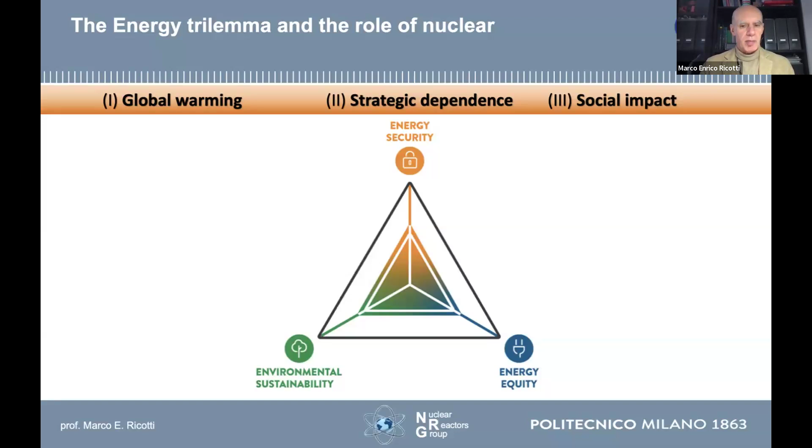A brief overview of what's going on today and in the next decades at the international level. This is a slide that I use every time I have a seminar on nuclear energy. These are the five different technologies that nuclear may offer as a contribution to solving the energy trilemma. First of all, we have more than 415 nuclear power plants in operation in the world. They are of what we may call standard technology, developed in the 70s, 80s, and 90s.

Several of those units are reaching the end of their commercial life, typically after 40 years. They should be shut down, but what is going on is that very likely those power plants are well managed, well designed, well built. The margins of safety and operability are very high, quite good. So what occurred in the US in the last 10, 20 years will surely occur also in Europe and in other parts of the world.

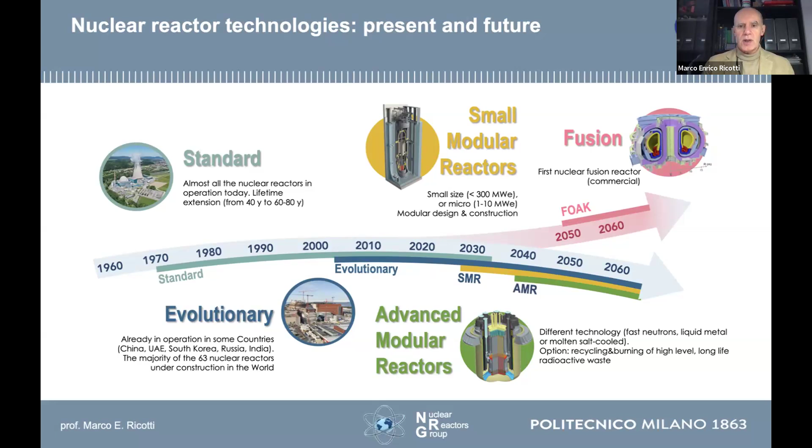And then 2050 or beyond, though some people are saying it will be before 2050, we may have the first commercial units based on fusion reactors. But this is really a challenging issue. Let's go to the main features of small modular reactors. Small modular reactors are reactors with a smaller size with respect to the traditional one, which is beyond 1 gigawatt. They are typically below or in the range of 300 megawatts electric.

What are the advantages and what are the challenges? The advantages are that several designers are using a sort of simplified approach in designing the SMR. Several of them are adopting a passive safety strategy, systems based on natural circulation. That means that we are substantially eliminating Fukushima-like scenarios. And I remember that there was only one safety system that operated during the Fukushima accident, in the first unit, the oldest BWR unit, and it was a passive safety system.

Then it was closed. The operator closed the valve, isolating the passive safety system, because it was cooling the reactor pressure vessel too much. And when they learned what the situation on the site was, they decided to reopen the passive safety system, but they ran out of electricity. The batteries expired. So there was no more possibility to reactivate the only safety system that was in operation in Fukushima, which was a passive safety system.

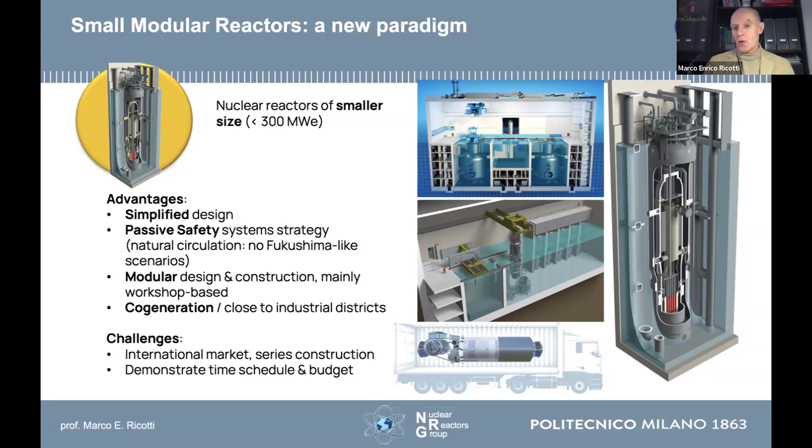So this is the key issue for, I would say, all the nuclear technologies. I mentioned 2040, more or less. We may have also the availability of advanced modular reactors. No more water-based. Typically, the main SMR concepts are water-based technology. With the advanced, we are moving to liquid metal reactors. So liquid lead or liquid sodium or molten salt.

So it's a different reactor physics, no more thermalized but fast neutron spectrum. And the advantages are, I would say, the same of SMR, so water-based. We have an increased efficiency. We may overcome quite easily 40% of efficiency in the thermal cycle. We may open a different option, that is the waste burner option. But for doing that, we need to separate the high-level waste. We have to recycle, and then we will burn.

The challenges for this type of technology are mainly the fuel development, the fuel cycle, the economics, and the fact that I have to integrate three nuclear plants. The first is the nuclear power plant, the nuclear reactor. The second plant that I need is a recycling, a reprocessing facility. And the third nuclear plant is the refabrication of the fuel. So I need on the same site, essentially, three nuclear plants. And the first country that will be able to demonstrate that in the coming years will be Russia.

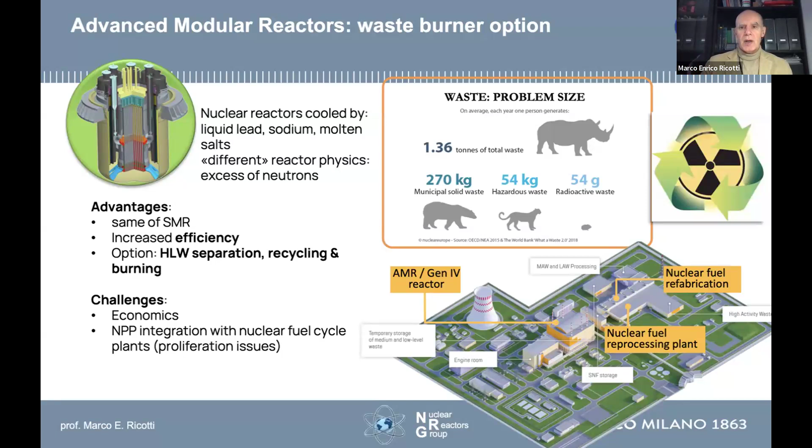We have different concepts of SMR and AMR. We may have a sort of clustering of those concepts by their use or by their site. For example, we may discriminate the SMR, AMR concepts in terms of land-based nuclear reactors or marine-based or transportable nuclear reactors, or in terms of electricity and heat production versus the use of SMR or AMR for propulsion.

And this could be a very interesting market because the cargo ships are emitting a not negligible quantity of CO2. Now, due to the geopolitical issues, the cost of transportation of goods increased a lot. Also, the time of transportation. So a nuclear reactor as propulsion for cargo ships is something that is very attractive today. The last type of clustering could be with respect to the grid. Some SMR units may be connected to the grid, or others may be off-grid, related to remote areas, for example.

Or we may discriminate the concepts of SMR and AMR by reactor technology. So we will have light water reactors. We may have integral layout versus classical loop type layout for PWRs, for example. But we may have also sodium cooled, lead cooled fast reactors, molten salt reactors, high temperature gas reactors, and microreactors that may use different technological solutions. For example, heat pipes instead of a cooling system in the classical way.

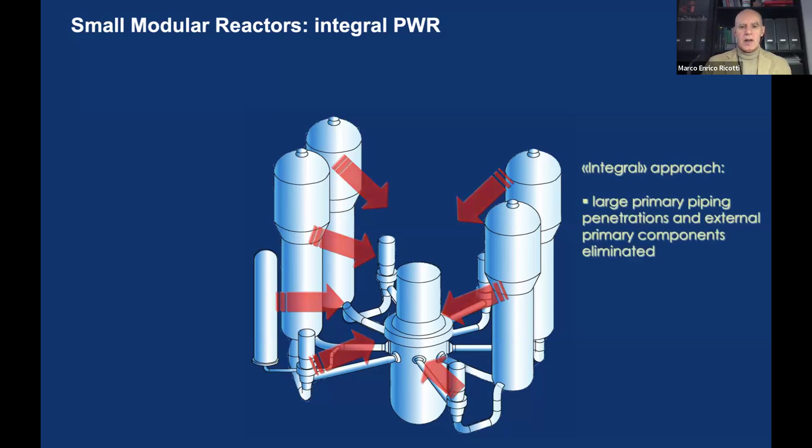Let me put some focus on the integral PWRs because they are a good percentage of the SMR concepts that are proposed today. And we spent a lot of years studying and putting research on this type of concept. You see here what you know already well, the classical PWR layout with the reactor pressure vessel, the primary piping, the steam generators, the pumps, and the pressurizer. So let's imagine that we may put all the large components that are outside the reactor pressure vessel all inside one single larger, taller reactor pressure vessel.

This is the integration. In this way, we may eliminate the large primary piping penetrations, and all the external primary components are included inside the reactor pressure vessel. So we end up with a PWR still, but with a very compact layout. The other advantage is that we may use a compact containment, and we have a smaller primary building and a smaller footprint for the power plant.

This is an example of comparison between the containments. The steel containment for AP600, a classical two-loop PWR developed by Westinghouse, and this is the size of the containment. It's a steel containment, 40 meters in diameter and almost 60 meters in height, versus one concept that we developed with Westinghouse in the past, the IRIS integral reactor concept, with only half the size, so 335 megawatt electric, but with a very small and compact containment, steel in steel, 25 meters diameter, the sphere, so 1/6, 1/8 of the volume of the containment.

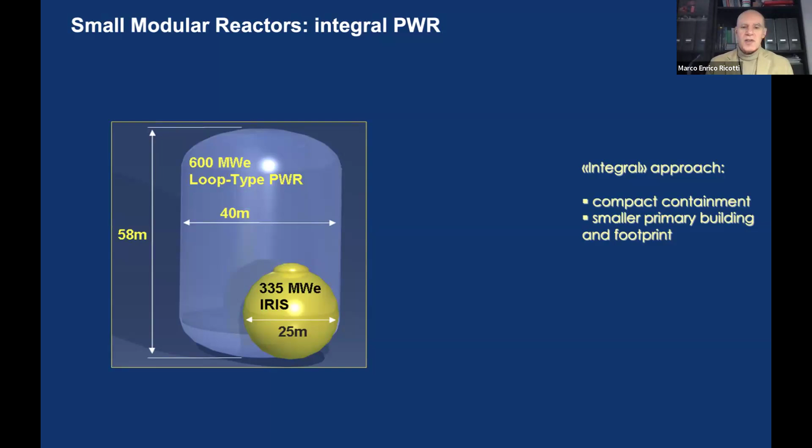The integral PWR is usually putting all together the steam generators, the pumps inside, also the internal control rod drive mechanism. Not all the concepts are like that, but this is the maximum level of integration that we may reach. So we have penetrations of the reactor pressure vessel, but not primary penetrations. They are secondary side penetrations.

So we have the core at the bottom, we have a large riser. On top of the riser, we have the control rod drive mechanism. And then in the annular region, we have on top here the main circulation pumps. Then in the annular zone, we have the steam generator modules, and then we have typically quite a large downcomer in the lower part of the reactor pressure vessel.

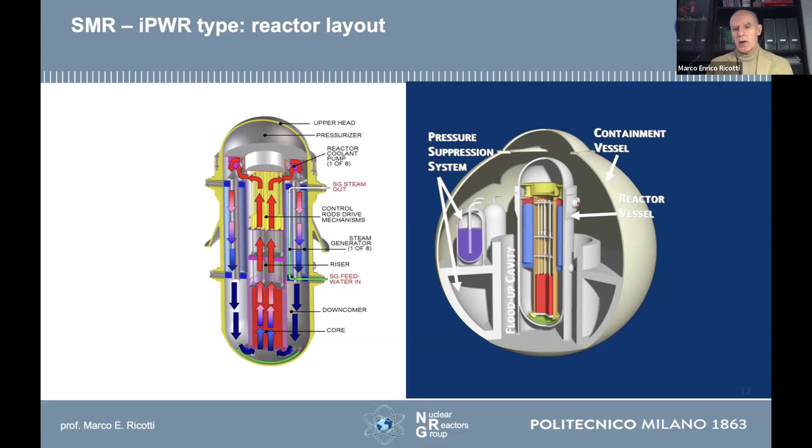If you are adopting a very compact containment, like in this case, but it is also the same for NuScale, for example, in some cases we may adopt the typical BWR containment strategy, that is the pressure suppression containment, not a pressure containment. And this is what we developed for IRIS, with the pressure system to suppress the steam in case of a small break LOCA with the pressure suppression pools.

But really, in terms of SMR concept, if we look at the integral PWR, this is not really a brand new concept, because a very similar integrated concept was in operation for more than 10 years on the German ship Otto Hahn. It was a cargo ship using an integral PWR, 38 megawatt thermal, with helical coil steam generators, a solution that is largely adopted by several SMR concepts today.

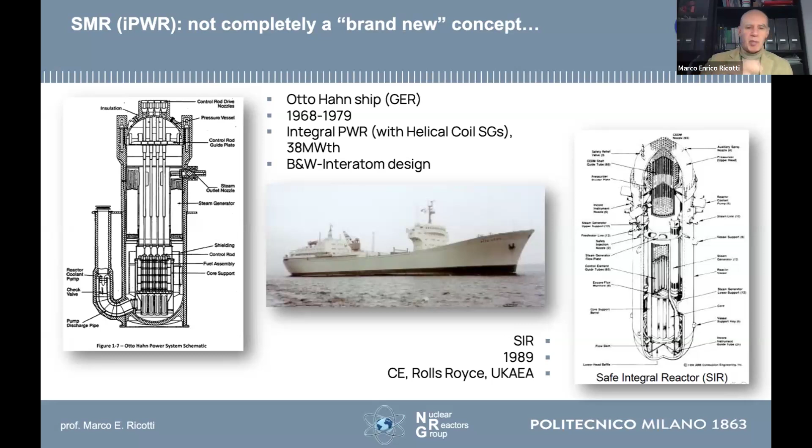And at the end of the 80s, there was another project in the UK by Rolls-Royce. It was the SIR, safe integral reactor, that was very similar to the Otto Hahn ship nuclear reactor, with again helical coil steam generators, the modular approach, with the pump not inside but connected directly to the reactor pressure vessel.

About the fuel and fuel cycle, usually for the SMRs based on water-cooled technology, we have not really a sensible difference from the current generation 3 PWRs. So the enrichment is usually the same as the current PWR, so less than 5%. In some cases, some designs are targeting HALEU, high assay low enriched uranium, so slightly below 20%; 19% is the typical enrichment. But this is not an easy task because today high assay low enriched uranium is not really available on the shelf.

They are usually adopting shorter fuel assemblies, fuel rods, so typically half the height of the classical PWR or BWR fuel assembly. And also some concepts are proposing a boron-free core. It is a challenge for the control rods and also for the burnable poison, but it has the advantage of eliminating a huge quantity of ion exchange resins for the control of the boron content, which for decommissioning is a challenge anyway.

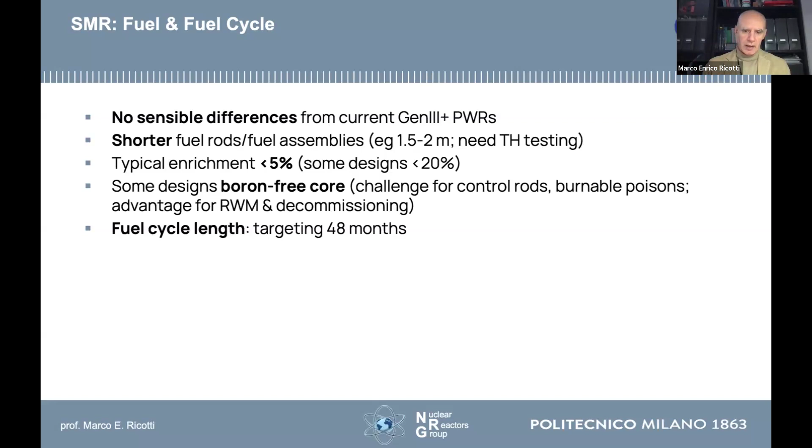About the fuel cycle length, several concepts are targeting an extended fuel cycle, typically around 48 months, so more than doubled the current fuel cycle length. And I put here a table comparison for some of the integral PWR concepts from Argentina, US, China, and others, and you can see the main differences. Only in few cases, the Russian technology, they are using 20% more or less content of U-235, but typically the enrichment is below 5%.

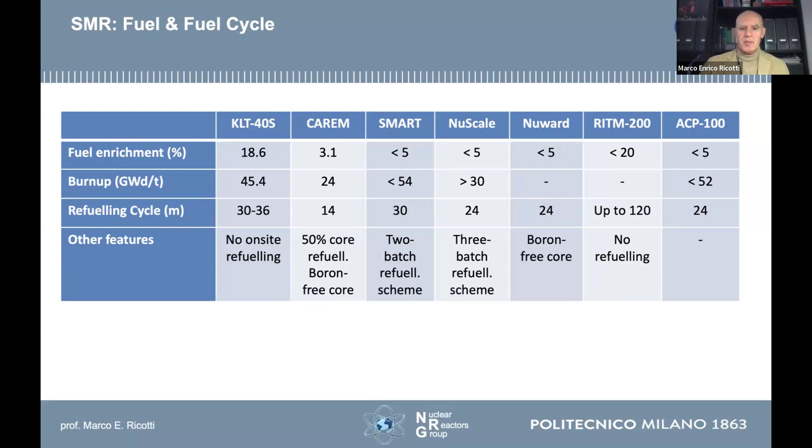Other opportunities, or the main opportunities for the SMR. I would say that SMR could be the preferable solution for electricity grids of limited size, but also for remote areas. It is also, from the economic and financial point of view, a good solution for those utilities that have limited financing capacity. They cannot afford the endeavor of a multi-billion unit cost, like for the large nuclear power plants. That means around 10 billion euros, or more than $10 billion investment for a single large unit.

Because of the size and also because of some features of SMR technology, we may more easily integrate nuclear with renewables. That means that we can avoid a system cost for the country related to energy storage and grid development, reducing the system cost for the community. As I mentioned before, we may open the window on cogeneration applications: producing electricity and heat for hydrogen production, for example with high temperature electrolysis, for district heating, for desalination, to produce biofuel, for example for aviation, and also to have hydrogen or thermal energy storage.

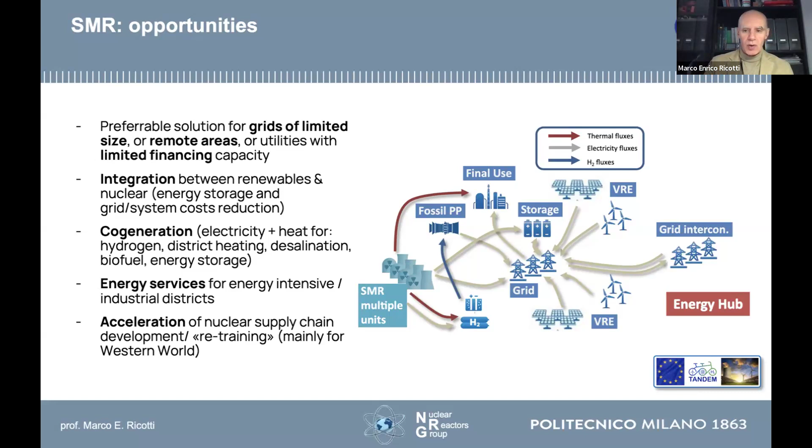Now, let us look at the safety features, the main safety features for the SMR concept. In some cases, for example, for the integral PWR, we have very interesting safety features. As I mentioned before, if we are integrating all the main components into a taller and in some cases larger in diameter reactor pressure vessel, we are eliminating by design the large loss of coolant accident because we will not have large piping penetrating the reactor pressure vessel.

If we are considering a full natural circulation PWR, integral PWR like CAREM in Argentina and NuScale in US, in that case, we don't have the pumps. But also in the other concepts, we may have pumps located internally in the reactor pressure vessel or pumps that are directly connected to the reactor pressure vessel. That means we are adopting canned motor pumps. If that solution is applied, we would have no potential leakages at all, or we have a reduced probability of leakages by the pumps.

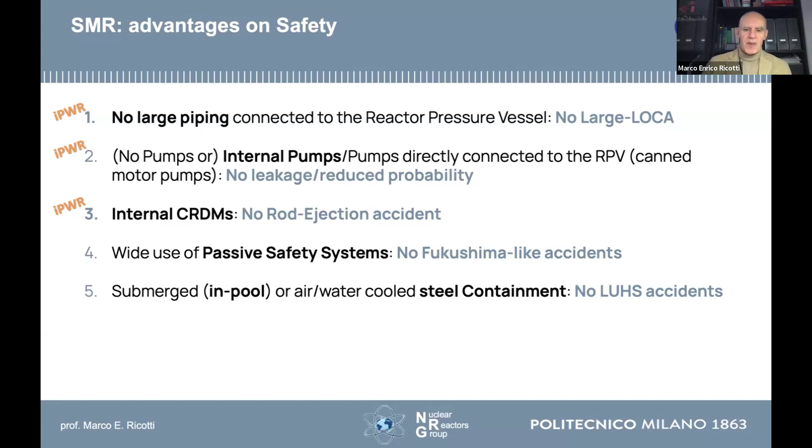Since we may target a higher level of safety for this type of SMR concept, we may also have the possibility to discuss with the safety authorities in order to reduce the emergency planning zone. And in some cases, they are claiming that for their SMR, the emergency planning zone is reduced to the fences of the power station. That means, roughly speaking, a 500 meter or maximum 1 kilometer radius area from the reactor core.

We can try to reach that goal because we have a reduced source term and we are adopting passive safety systems. So there is a high potential. It's not granted, but there is a high potential for a discussion with the safety authority in order to reduce the emergency planning zone. And this is an important feature for the stakeholder engagement, the public engagement in the nuclear technology.

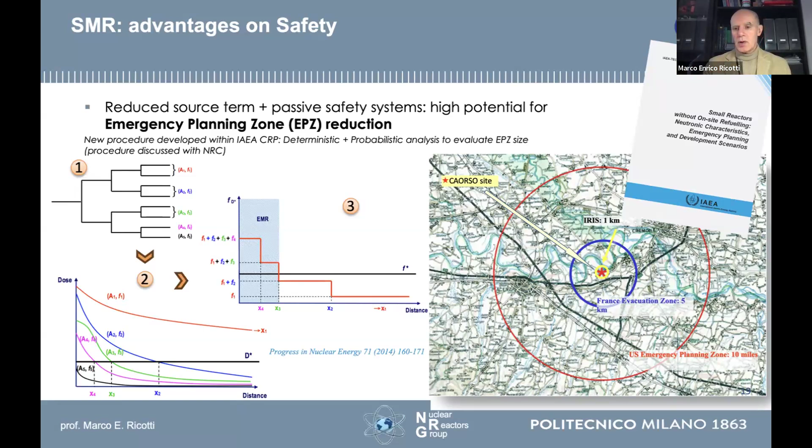There was a technical document issued in the recent past by the International Atomic Energy Agency. We developed an approach, a procedure in order to try to demonstrate that; it is a probabilistic and deterministic approach. If you want, you can download the paper from Progress in Nuclear Energy or download the tech document from the agency site.

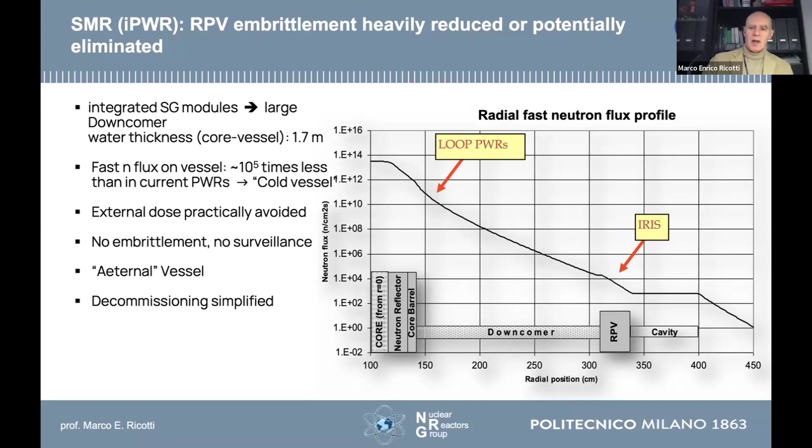Other innovations in terms of safety, if we are adopting passive safety systems, I would say mainly for integral PWRs, but not only. For example, for the core cooling system, we may inject water by gravity in a passive safety system. The decay heat removal system could be based on natural circulation with two-phase flow in closed loops. We may target an in-vessel core retention strategy in case of severe accident, if we can flood the reactor cavity.

The diverse shutdown system is, I would say, a classical boronated water injection, but not in an active system, but by a passive system, so by gravity. And if we are adopting a steel containment, we may have a steam condensation by external water or air, as I mentioned before, if it is submerged into a pool, or if we are using natural circulation by water or by air outside.

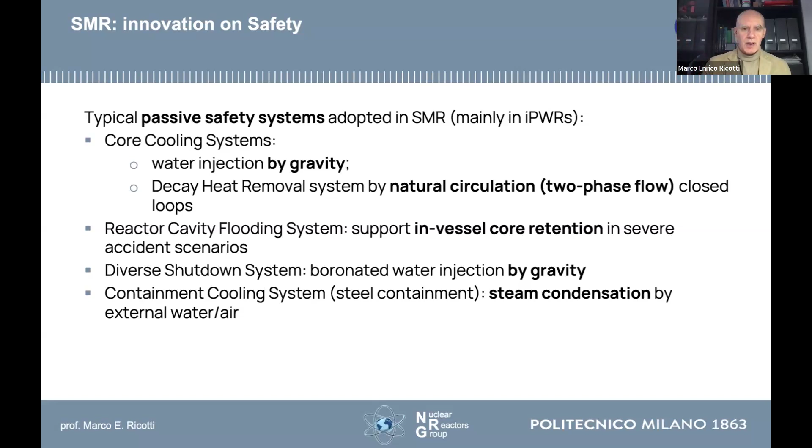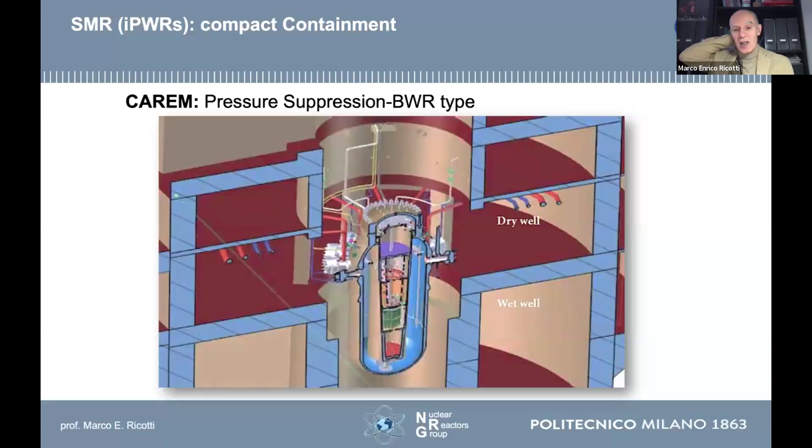The compact containment, I showed you the slide at the beginning. We may adopt the pressure suppression, classical BWR type containment, even for a PWR integral concept. And this is the case for CAREM, the Argentinian design. And you see here a pressure suppression containment that is very similar to the BWR concept.

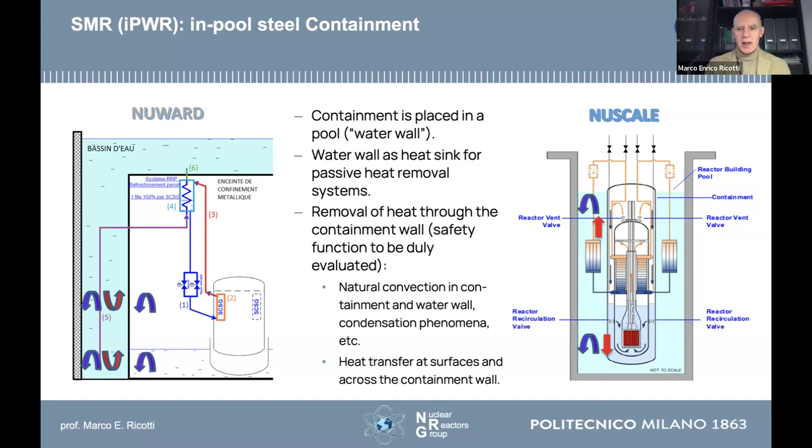In case of the steel containment, we had a past option, now the design has changed, or the current design of NuScale that is using a steel containment, the steel with the reactor pressure vessel, the integral PWR inside, all submerged into a large pool with the heat exchangers in the pool itself that are operating in natural circulation.

With respect to the size of the SMR, we may target a very interesting safety feature like in NuScale, since the size of the NuScale module is very, very small. It was at the beginning 55 megawatt electric. Now, because of economics, they upgraded the concept to 77 megawatt electric. I would say that it's still a challenge from the economic point of view, but from the safety point of view, it may offer a very interesting solution

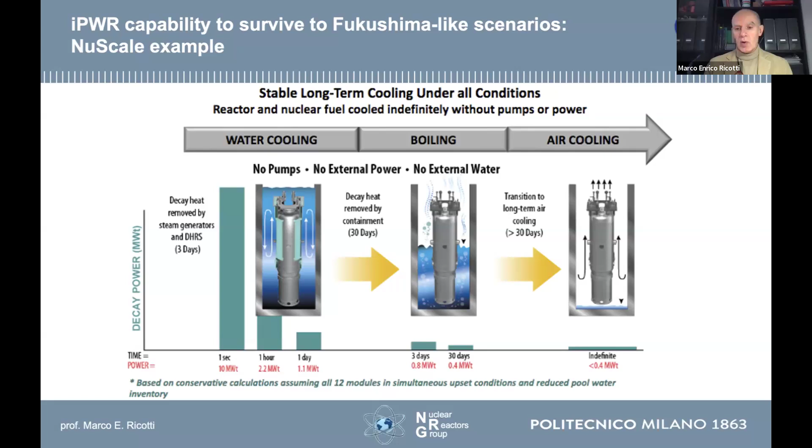The water in the pool is cooling down the reactor pressure vessel just by evaporation. And after 30 days, the decay power is so low that once the water is completely evaporated, just the natural circulation by air is able to cool down and keep the reactor core in a safe mode. Obviously, this is allowed by the adoption of water, the steel containment, but also because of the very small size of the module.

The typical passive safety systems that are adopted for the decay heat removal or residual heat removal system are passive safety systems directly connected to the steam generator with the water pool or with air cooling, or directly connected to the primary side. In the first case, remember that the steam generator is inside the reactor pressure vessel in case of the integral PWR. It would be outside if it's a classical loop type. In the second case, we have the natural circulation loop directly connected to the reactor pressure vessel.

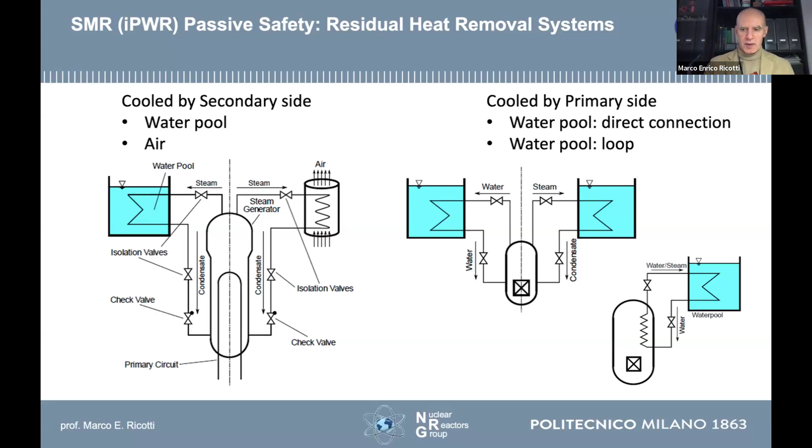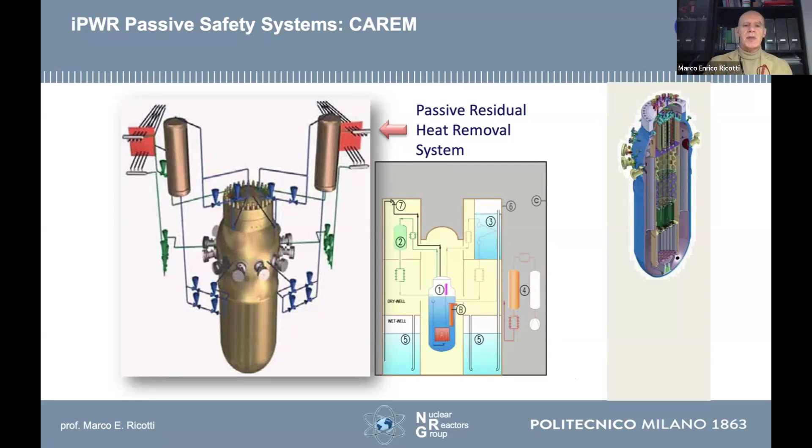And these are some examples of the integral PWR concept. This is CAREM, the Argentinian one. The passive residual heat removal system shows that there is a condenser dipped into a pool, number 3 here on the right side of the slide. And this condenser is directly connected to one module of the steam generator that is inside the reactor pressure vessel.

The same solution for NuScale. They have a classical condenser placed into the large pool. And this condenser is closing a natural circulation loop through the helical coil steam generator that is inside the reactor pressure vessel.

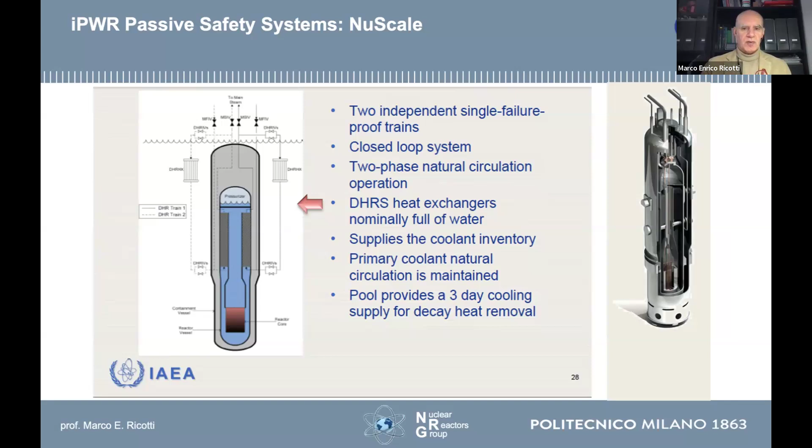A similar solution was designed recently for SMART, the Korean SMR, when Saudi Arabia became a partner of the project. Saudi Arabia asked KAERI, the Korea Atomic Energy Research Institute, to modify the original design of SMART, which was an active-based safety system strategy, into a fully passive-based safety system strategy. So again, they connected a condenser and an external pool to the steam generator modules, which in this case are also helical coil steam generators.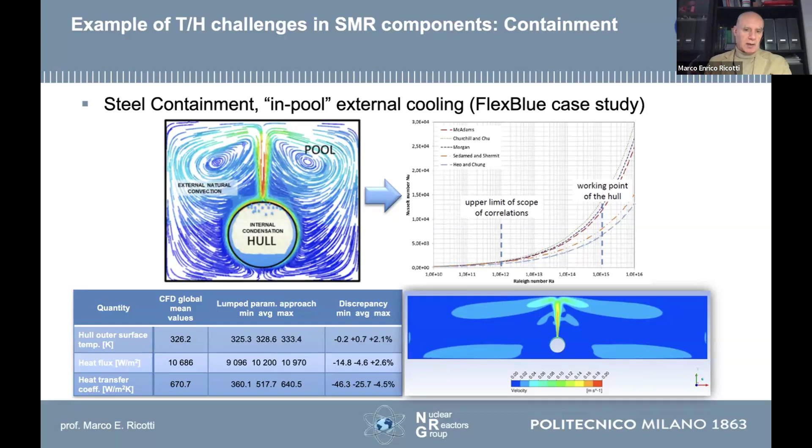And this is something that we studied for Flexblue, the French concept of SMR into a hull, a sort of hull of submarine. Because of the large dimension, more than 15 meters diameter of the hull, we end up with this type of situation. So the only way was to investigate this solution with CFD. But that means that we need experimental activities to validate that CFD analysis.

Another challenge from the thermohydraulic point of view is the large downcomer that is very positive for the thermal inertia, very positive from the neutronics point of view, the very reduced embrittlement of the reactor pressure vessel. But it means that we would have a large turbulence in that area. We had the problem of investigating the level of mixing of hot water, cold water, boronated water, fresh water into the downcomer in order to guarantee that we will have a good mixing of the water at the inlet of the reactor core to avoid a hot spot in terms of reactivity into the reactor core itself.

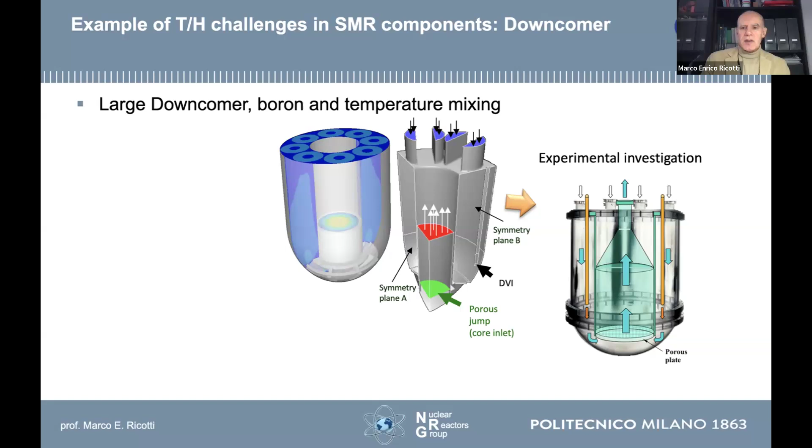And this was an activity that we performed in the recent past for the IRIS design. We had to set up an experimental facility to investigate the mixing, but we had also to develop nonlinear eddy viscosity models for the CFD analysis. So it is a modeling and experimental activity that is required by the new layout, the new solution that some SMRs are proposing.

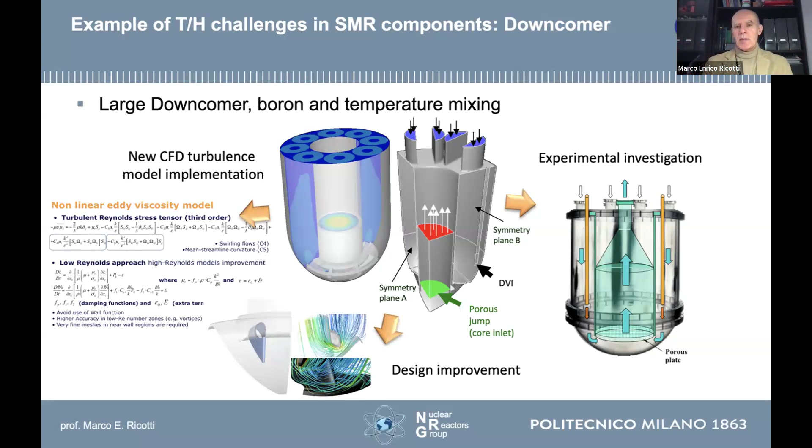Not only modeling, I mentioned the experimental activity. The experimental activity is fundamental, especially if we want to license the SMR concept. We are typically approaching two different sets of experimental activities. The first group is the so-called separate effect test facilities. They are devoted to the fuel investigation and also the investigation of the components that are typically integrated. So the pumps, the steam generators, the control rod drive mechanism, the pressurizer.

I need those separate effect test facilities to demonstrate the capability of the code to predict the real behavior of those integrated systems. I have also to investigate the safety system, typically the passive safety system that I'm using in natural circulation in two-phase flow. But at the end, to convince the safety authority, I have to show them not only separate effect test facilities, but very likely also an integral effect test facility.

That means one large facility that is simulating all the system, the primary system and the safety systems. Typically with a large scale, I need to demonstrate the capability of the codes to simulate the integration of the components and the interaction between the primary system, the safety system, and in some cases, even the containment, if I'm adopting the steel containment.

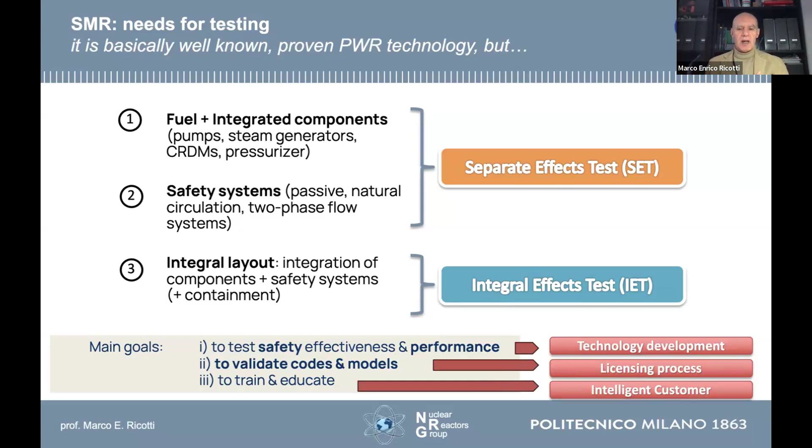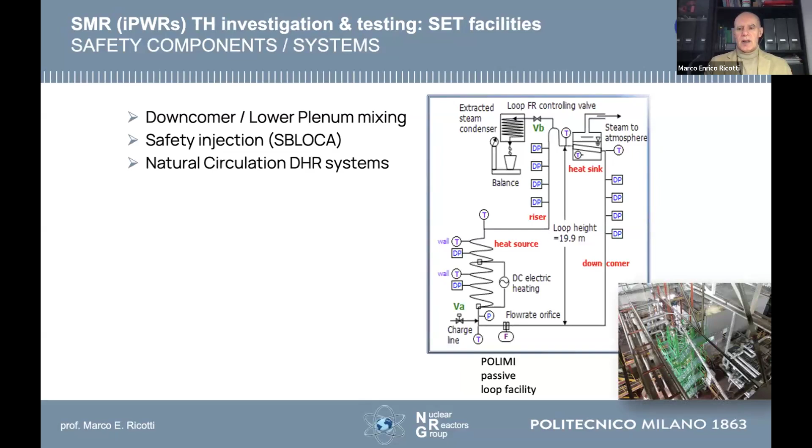Here, some examples of separate effect test facilities. This is a facility that we set up in Italy, in the SIET lab some years ago for the IRIS project. It was the simulation of the whole passive safety system based on the helical coil steam generator module, and then a condenser outside of the reactor pressure vessel, but within the steel containment, to set up a closed loop without a pressurizer, a pressure sliding system.

And we investigated the performance and also the map of stable behavior of the system in order to investigate the natural circulation.

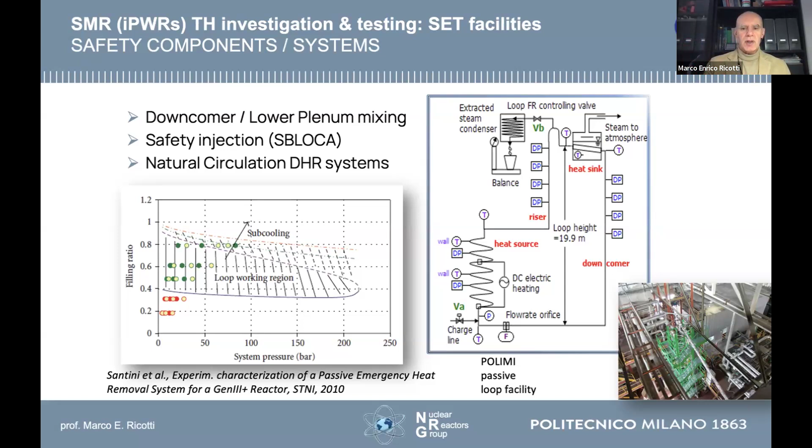But we will need also integral testing facilities, and this is an example of the Chinese colleagues for the ACP100. They set up one of the largest integral effect test facilities in the world. It was 1-to-1 full scale in height because you cannot scale down natural circulation. So you have to set up a full scale in height system. Also full scale in pressure and temperature.

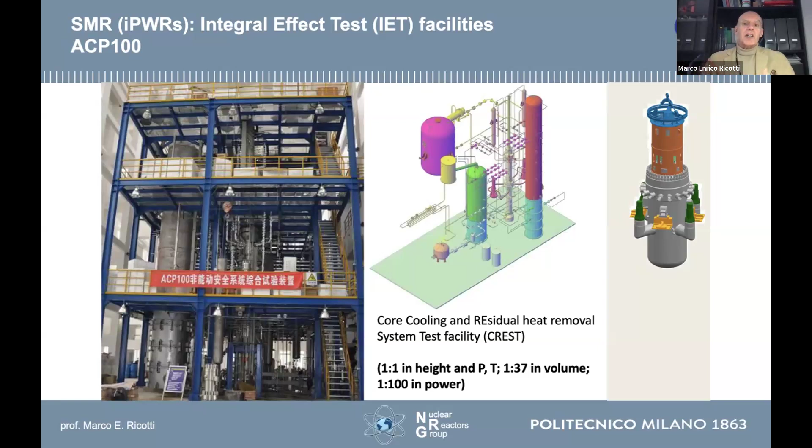But anyway, with the large scaling, 1-to-37 in volume, that is one of the largest facilities in the world, and 1-to-100 in power. Typically, to give you an idea, in SIET, they set up the integral testing facility for the AP600, AP1000 Westinghouse large reactor. And the scaling factor for that large facility was 1-to-357. So here it is one order of magnitude larger for testing the integral PWR.

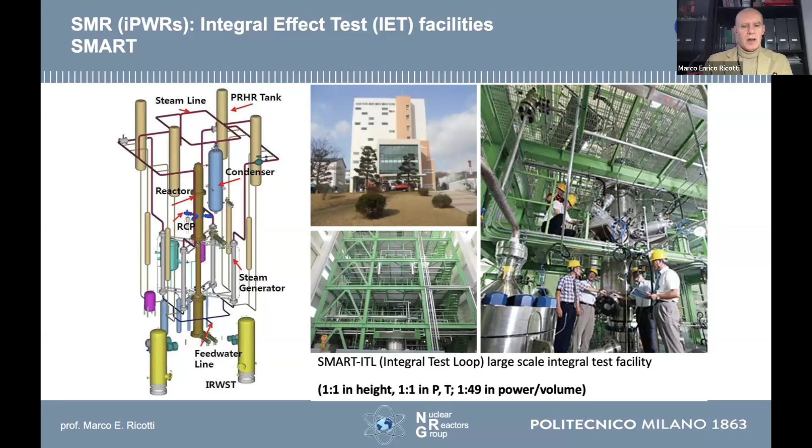And also the SMART facilities, the integral test facility for SMART, the Korean concept, was similar. It was an integral loop, full scale in height, pressure and temperature, and 1-to-49 in power and volume.

One approach, very interesting approach to the safety analysis that we may use for developing this SMR concept is the risk-informed approach. So the integration between deterministic analysis and probabilistic analysis. This is another experience that we had for IRIS. We had the design and safety analysis team addressing the deterministic approach. And then we had a PSA team, a probabilistic safety analysis team. The design team was providing data and boundary conditions to the PSA team.

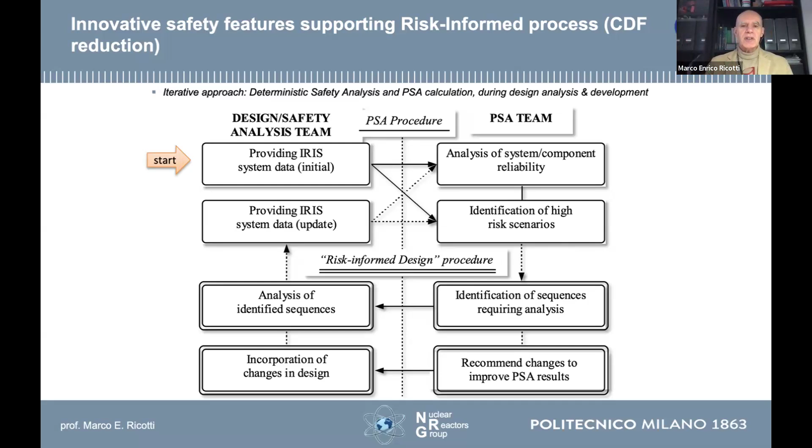The PSA team performed the preliminary PSA analysis, identified the weak points in the design, and gave this type of information to the design team. The design team changed the design, provided new data to the PSA, and that loop was performed several times during the years, during the development phase of the concept. And this is the result.

So we start with the estimated core damage frequency for IRIS that was 10 to the minus 6. And every dot is a change in the IRIS SMR design. We worked a lot in 2003, 2004, 2005, having this loop of design development, PSA analysis, design change, PSA analysis, and so on. After several changes, we ended up with a core damage frequency that was reduced by 2 orders of magnitude. So from 2 times 10 to the minus 6 to 2 times 10 to the minus 8.

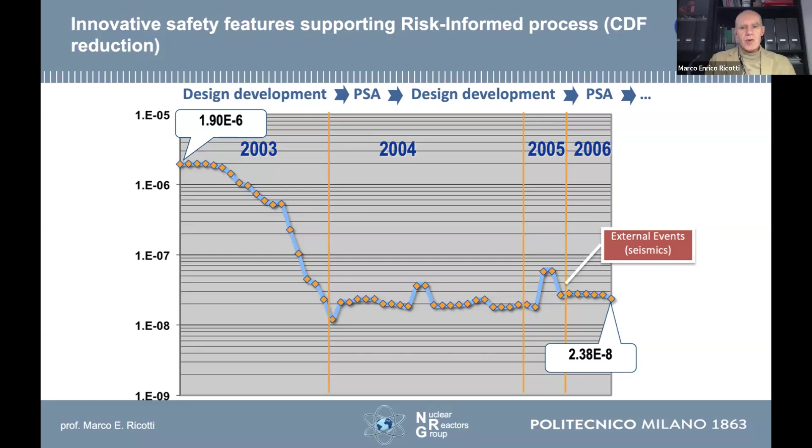Even after including the external events, the seismic events, since we decided to go with the fully seismically isolated primary building. So this is quite an interesting result of this type of approach that is anyway adopted by several SMRs today.

But the real story was quite different. All those projects had more than 7 years of delays and more than 80–90% overrun in the budget. In some cases, like Olkiluoto, they almost tripled the cost of the construction of the unit. In one case, it was even worse. This is Summer. They started building the first AP1000. After spending $7 billion, they decided to stop.

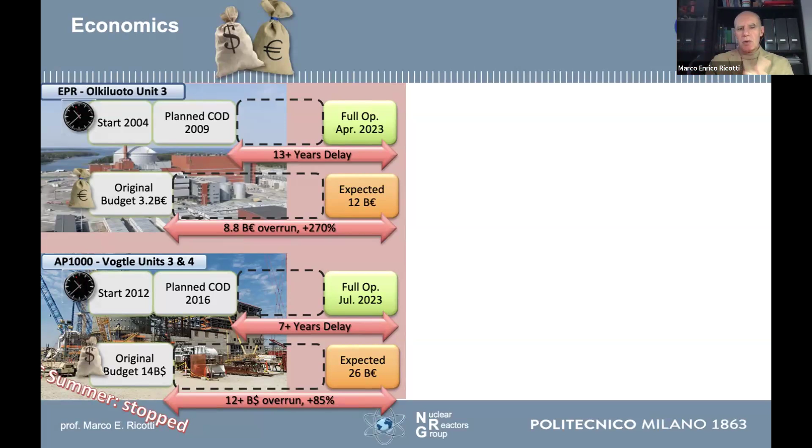It was stopped also in Vogtle, but after 2–3 years of suspension, they completed the unit. Today, VC Summer is still stopped. And it is not clear what will be the final decision for that. Is that a problem of the nuclear technology? The answer is on the right side of the slide. If you look at Barakah in the Emirates, APR1400 is not the same technology, but is very similar. It is the South Korean technology.

But if you look at Sanmen and Taishan in China, exactly the same technology, AP1000 and EPR, built and now in operation for several years, without the same delay, without the same extra cost. So, is the nuclear technology the problem? No, because with exactly the same technology, I'm not saying perfectly, but almost in a very reasonable time frame and budget, they built exactly the same evolutionary technology that completely failed in the Western countries.

And if I'm saying failed, it means strictly speaking failed, because both Areva and Westinghouse went into bankruptcy because of this negative experience. So now Westinghouse is owned by a Canadian investment company, and Areva is now in EDF. So it returned to the original name Framatome. It is in EDF.

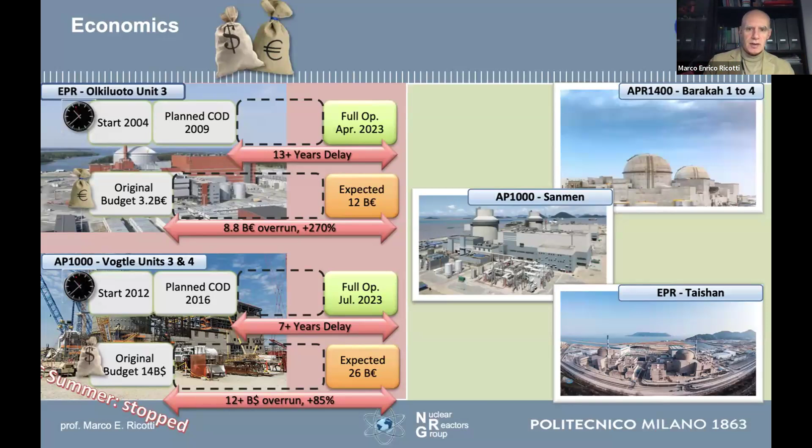Okay, this is one of the reasons why SMR could be attractive. SMR, if we are designing and building a unit that is more simple, is smaller, it is modularized, we should be able to build the SMR units on time and on budget. This is a sort of promise, but we have to demonstrate that on field.

On the other side, we have a negative feature for the SMR. The universal law, not only for nuclear, but for all the industrial system, is the economy of scale. And this was the trend that nuclear followed since the beginning, since the 60s. The first units were 100, 200, 300 megawatt electric, and then they developed the 600 megawatt electric plants, and then the 900 megawatt electric plants, and then the 1200s, the 1600 megawatt electric units. So following a universal law that is economy of scale.

So if now we are with a specific cost euro per megawatt with the 1200s large reactor, if we want to go back to smaller scale, we will have a disadvantage given by the economy of scale that would move the specific cost of the SMR units at a very high value. So from this point of view, it would be a nonsense to go with the SMRs. But what could be the features of SMR that may reduce this disadvantage, that may bring down the specific cost of the SMR to something probably even larger, but competitive with the cost of a large reactor? We have at least 5 features.

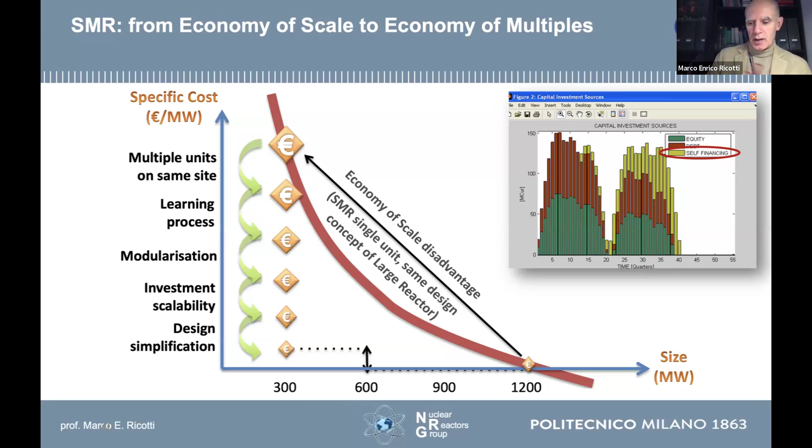Because after deploying the first unit, I'm starting selling the electricity, and part of the gain that I'm getting from the selling of the electricity of the first unit could be invested in the construction of the second unit, and so on for the third and the fourth. So I may exploit also a self-financing approach for the deployment.

So briefly speaking, we have to move from the economy of scale to the economy of multiples, and the typical comparison is between a chicken egg, a classical small chicken egg, and an ostrich egg. An ostrich egg is something that is very large, quite expensive, very massive. So from the point of view of the industry and the supply chain, we have uncommon suppliers and few suppliers of those large components and large units.

While for the chicken egg, if we reduce the size and the complexity of the components, we may target a more standard product. We may have more standard suppliers that are already trained, so they are already experienced, and I may enlarge the number of suppliers that could feed my design and my deployment.

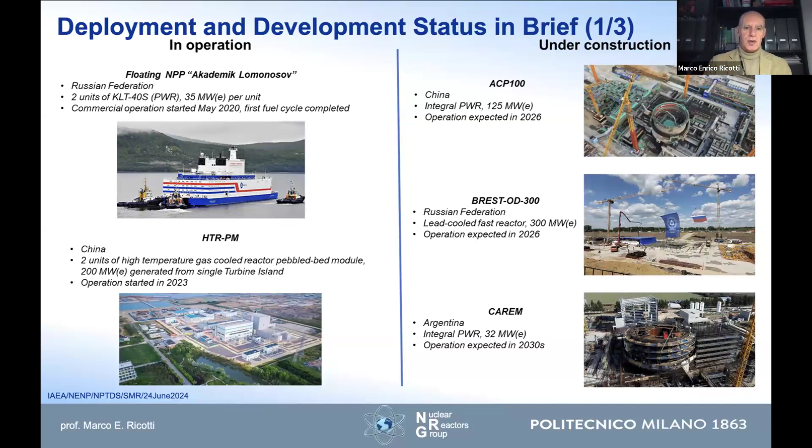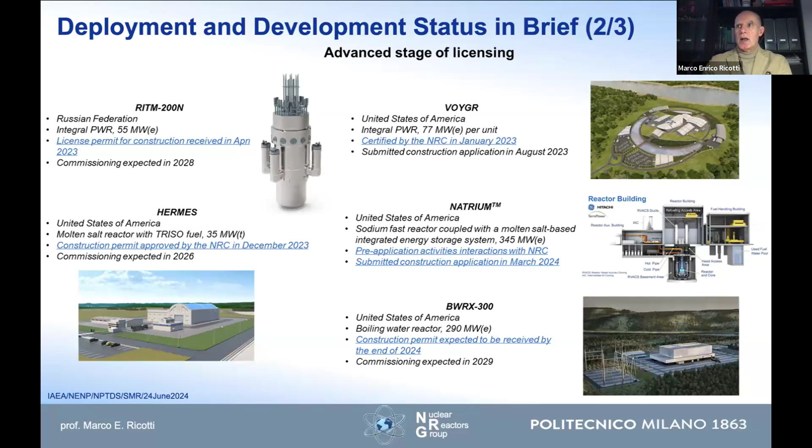And they will start to build this nuclear reactor first of a kind in Canada. Ontario Power Generation is beginning the construction in Canada next year. And this is my short list of what I personally consider the most advanced concepts for integral PWR.

But I want to remember that there are today more than 90, I have to update that number, more than 90 SMR, AMR, microreactor concepts or designs that are under development in the world. You can download the booklet that IAEA is periodically updating. There will be an update, I think, next year. And I put an example of the integral SMRs, CAREM, NuScale, RITM, ACP100, SMART, NUWARD, but you see a green curtain on that. I will explain in a while.

BWRX, and I put IRIS because it was our concept that we developed from 2000 up to 2008 with an international consortium. And I put the list of some of those concepts with respect to the size. So we have a large range of modules from just a few tens of megawatt electric for CAREM.

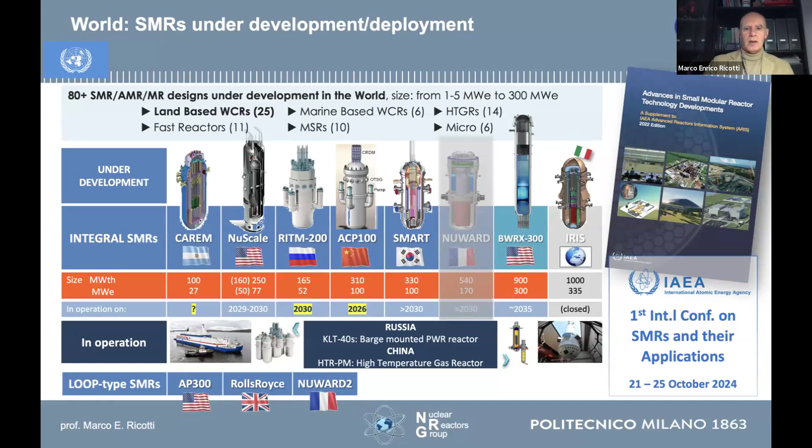What is going on in the agency? The agency, since several years, is putting a lot of effort on that. They have now a dedicated portal. It's a sort of one-stop shop initiative. If you go on the portal smr.iaea.org, you will find a huge number of information on that. They decided to have a single platform for the agency.

You know, the agency is subdivided in several divisions, I remember 8 divisions. But the SMR concept is a sort of cross-cutting concept. So they decided to offer to the member states a sort of one-stop shop. So if you need some information on the SMR, go on that platform, and you will have access to a different set of information on all the different topics, from safety to security, safeguards, fuel cycle, economics, technology assessment, and so on.

As Katrina mentioned at the beginning, I'm also chairing since 6-7 years the technical working group that the agency launched in 2018 on SMR. We have now 20 member states participating. Ukraine is a member of that. I put the name of the person that usually is participating in our meetings from Energoatom, Mr. Ilya Krasnuka. And we have periodic meetings on different topics. We have today at least 3 subgroups related to the user requirement criteria, the research technology development, the industrialization, and we usually perform activities on those topics along the year.

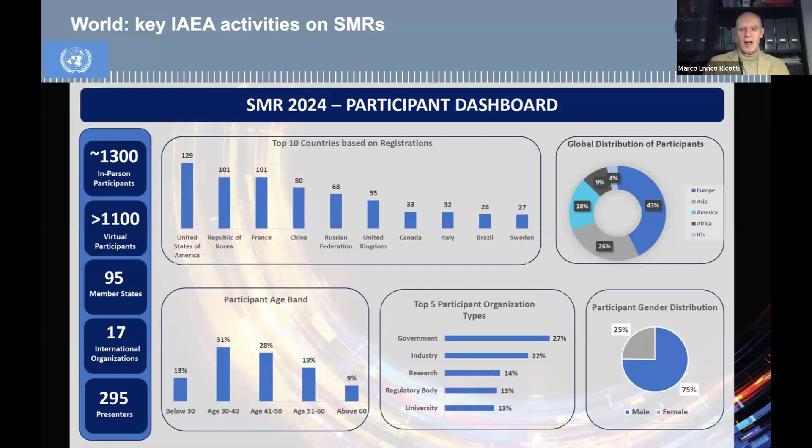Also the number of papers, the technical section, some numbers that are anyway explaining that it was the first, but a very impressive success. This type of response from the member states was not expected by the agency. There is a lot of interest in the SMR issue. Now, let us go to the closure of the seminar, then we will open to the discussion.

What's going on in Europe? In Europe, I think that we have a growing interest towards nuclear in general, including SMR. I put the list of the countries where in 2023, 2024, different governments declared interest in large reactors. All the countries that are mentioned here are interested in large reactors, but several of those countries are also interested in SMRs, a few of them in AMR or microreactors.

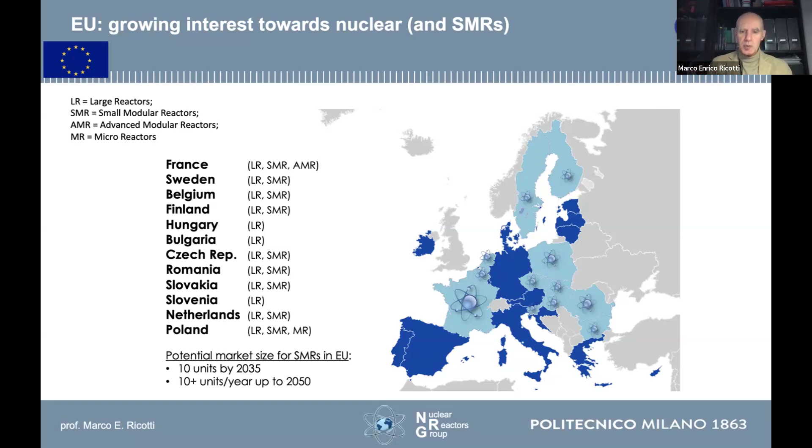Nuclear Europe performed a study on the potential market size of SMRs in Europe, and the numbers are quite interesting because, roughly speaking, as an order of magnitude, 10 units could be possible by 2035, and then from 2035 to 2050, there is a potential market of more or less 10 units per year in Europe. So if this will be the case, series production is really possible. So the economics of SMRs could be really practicable.

From the point of view of Euratom and research activity, this is the list of initiatives, and I think that some Ukrainian colleagues are already involved in those projects. For example, ELSMOR, TANDEM, SASPAM about the safety, the severe accident. ESFR-SIMPLE is for the sodium fast reactor. ANSELMUS is for the liquid metal SMRs. ECOSENSE is for the economic and social involvement for SMR. SUN is for the non-electric applications.

And the last project that was launched this year is the EASY SMR project. For the first time, more than 10 million euros were put on a single call. And the key target here is the testing of passive safety systems and components for the SMR concept. Not only that, but also testing.

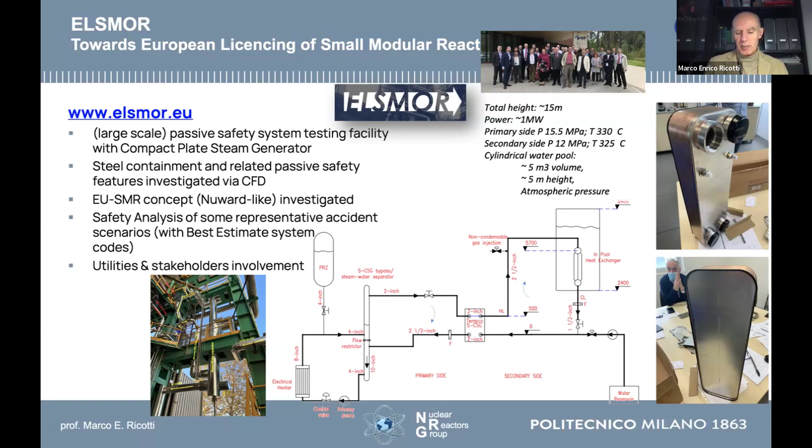For ELSMOR, the experimental testing was performed in SIET Labs in Piacenza, in Italy, for the testing of the passive safety system. It's a closed loop using a new concept of steam generator, a compact plate, very compact steam generator. An experimental facility was set up at scaled geometry, scaled power, but full pressure, full temperature, and full height.

The TANDEM project is addressing the topic of hybrid energy systems: SMR used to produce hydrogen, to be coupled with variable renewables, and also to produce desalinated water or to distribute heat to the communities. We developed an open source library in Modelica to be able to simulate this complex energy system. We performed some techno-economic optimization of that energy hub, and we also performed safety analysis of this coupling of SMR with the other plants via classical system codes.

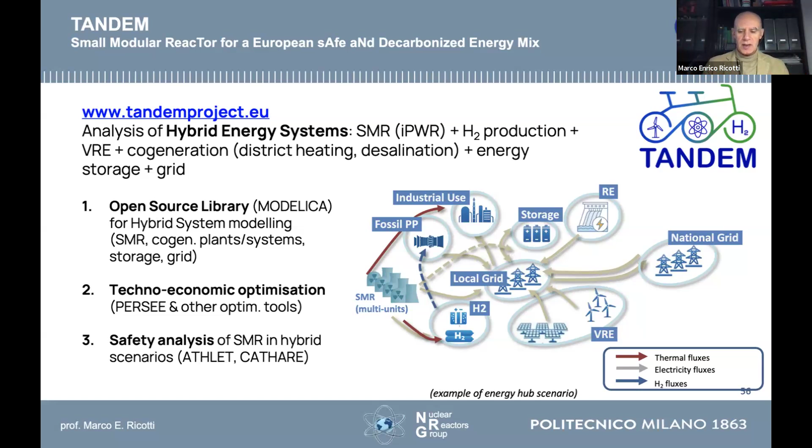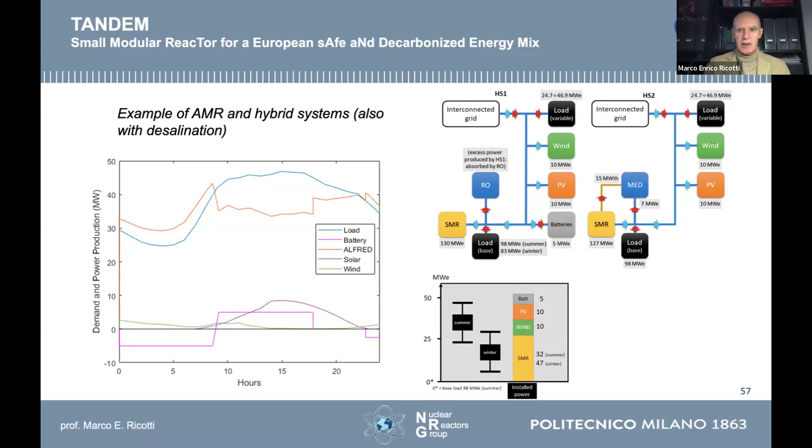What we learned is that there is the possibility to couple SMR, even AMR. This is a study that we performed with the lead fast reactor in different configurations, with the cogenerative approach, with the desalination approach. We can find the tool and the possibility to demonstrate the effectiveness of integrating an SMR plant within an energy system that is mainly managed by renewables that are in a way intermittent.

The topic of the SMR Alliance. This year in May, we launched the European Industrial Alliance on SMRs. The main target is to foster, to support the early deployment of SMR in Europe. The target is the first years of the 2030s. So the target is an industrial target. The number of members at the beginning was slightly less than 300. Today there are more than 320 members.

5 technologies are approached: the light water SMR, the advanced SMR. 24 or 25 designs are now proposed, from light water SMRs for electricity production, some light water SMRs for district heating only, so specific designs for district heating. We have advanced lead, sodium, molten salt, high temperature gas reactors.

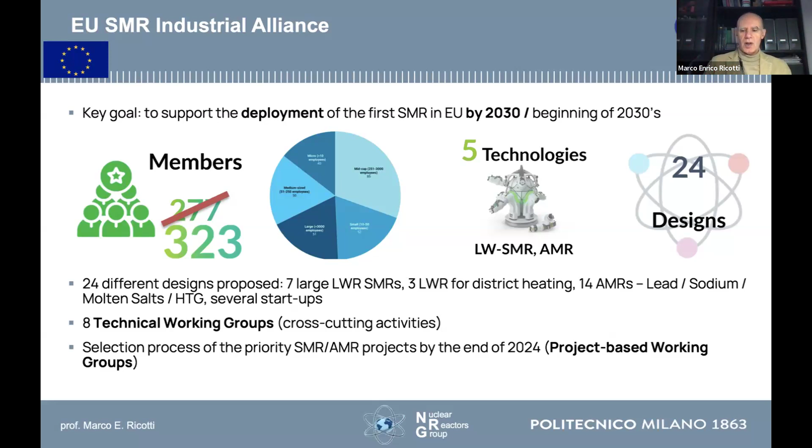We set up the initiative with 8 technical working groups that are cross-cutting activities, and then vertical project-based working groups for the projects. These are the 8 technical working groups, targeting the industrial applications, the technology and research, the supply chain, the skills and human resources, the public engagement, the nuclear safety and safeguards, the fuel cycle and waste management, and the financing, which are all very important topics for any type of SMR.

And we have also Last Energy, a very small 20 megawatt electric PWR loop unit, so a very, very small unit. But we have also Steady Energy and Calogena, the Finnish and French district heating designs. So very small reactors, but only for district heating, so low pressure, low temperature.

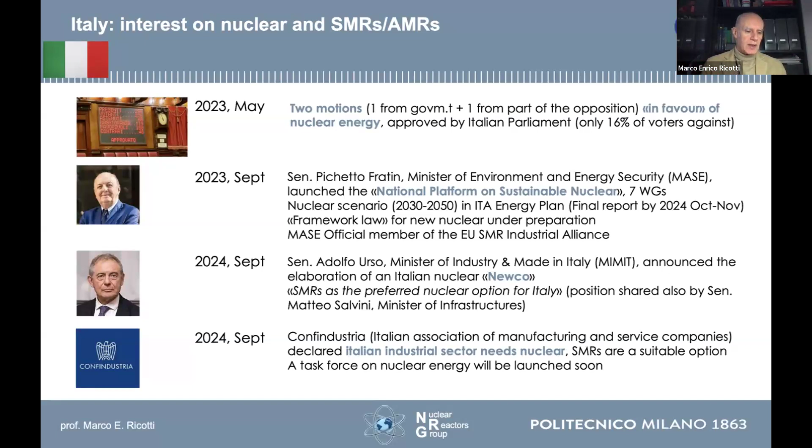Latest news: in September this year, Confindustria, the Italian Association of Manufacturing and Service Companies, the largest industrial association in Italy, declared that Italy needs nuclear, industrial sectors in Italy need nuclear, and they launched a task force on nuclear energy that is working now.

More than 50 Italian companies joined the European SMR Industrial Alliance. We are the second largest group of companies in the alliance, second only to France, and it is quite amazing because we don't have nuclear reactors in operation. There was also some industrial initiative. For example, Edison, the Italian utility owned by EDF, Ansaldo Nucleare, and the steel association in Italy recently signed a memorandum of understanding for SMR development, but also for power purchase agreements of nuclear electricity.

The last report issued was a report by Edison, Ansaldo Nucleare, and the Ambrosetti group. The target for SMR in Italy is that if we can target 10-20% of electricity produced by SMR or AMR in Italy, we will create more than 100,000 jobs with more than a 50 billion euro impact on Italy.

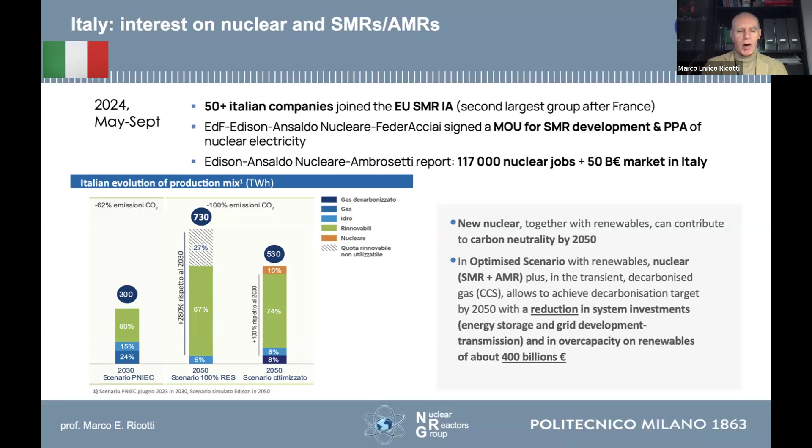That means we are not asking the citizens to pay for energy storage, grid development and transmission development because of renewables. This is a very important economic impact if we include nuclear in an energy strategy for a country, and we are not targeting an ideological plan of 100% only renewables.

We had this December the annual meeting of the Italian Nuclear Association. For the first time, we had a panel with policymakers, with members of parliament of all parties on the same stage. And the discussion was, I would say, quite good, because there was not one single totally anti-nuclear declaration. We had the speech from the Minister of Environment and Energy Security. He included nuclear in the policy document for Italy for 2030. They declared the interest in deploying SMR or AMR in Italy from 2030 to 2050.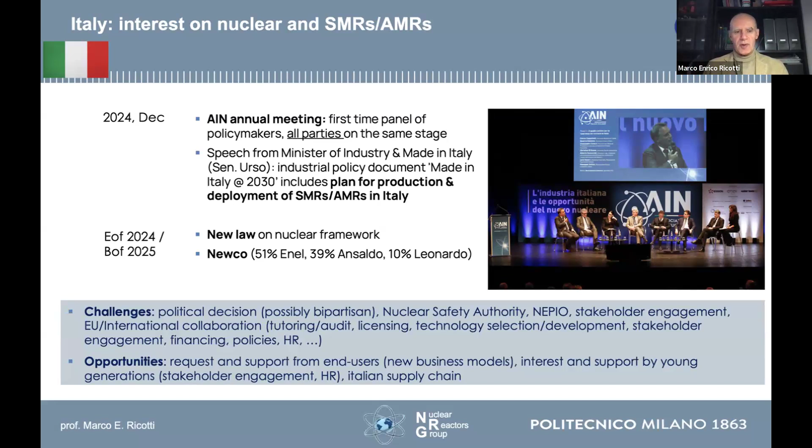The latest news is that in the coming Council of Ministers, in the first councils, there will be a proposal for a new law to set up a nuclear framework for the construction of nuclear in Italy, and the proposal of a new company that should be led by ENEL, the utility, with more than 50% of the shares. Then one of the largest contributions will be by Ansaldo Energia, Ansaldo Nucleare, and 10% by Leonardo, another state-controlled company.

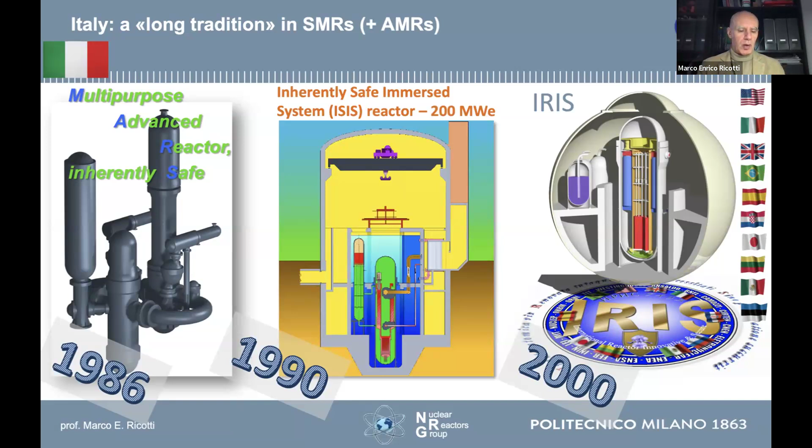There are obviously challenges, but also opportunities for Italy, but I don't want to waste too much time on that. I only wanted to remind you that Italy has a long tradition, I would say, in SMR. The University of Rome started developing in '86 a small SMR based on pressurized water reactor technology of the loop type, with a fully passive safety system. In the 90s, Ansaldo Nucleare developed an integral PWR. And then in 2000, you see the flags of the 10 countries, the 20 organizations that developed the IRIS concept. And Italy was the largest group of institutions developing that concept.

We had a huge experience in experimental activities. For example, SIET labs in Piacenza is the site for the large-scale experimental labs. It is owned by ENEA, Enel, Ansaldo, another company, and Politecnico with a smaller 3% share.

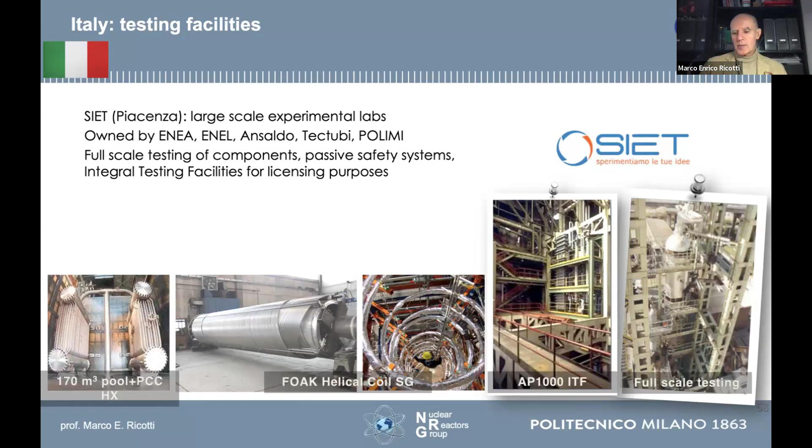They are quite famous also in the world for the full-scale testing of components, passive safety systems, integral testing facilities. You see in the picture on the lower part the isolation condenser for ESBWR for GE Hitachi, the helical coil steam generators for NuScale, the large integral testing facility for AP1000, and other integral full-scale testing capabilities on the site, with up to 10 megawatt electric power available.

The last slide is about an exercise that I launched together with Ansaldo at the end of 2023 and beginning of 2024. I invited the manufacturing companies and the forging companies in Italy that are expert in the nuclear sector. They are more or less 20-25. You see here the logos. And I asked them, how many reactor pressure vessels for SMRs would you be able to manufacture every year?

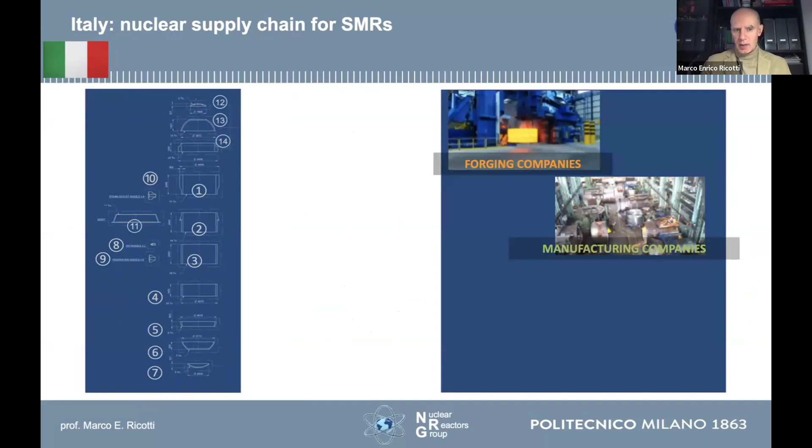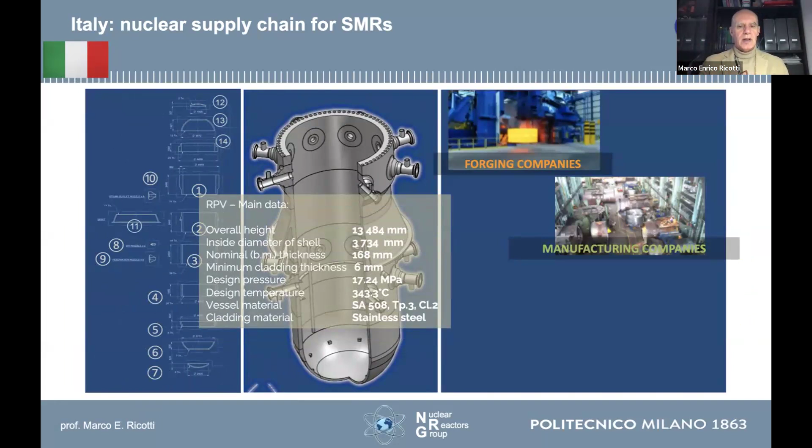You can download the brochure; I will leave you the QR code. You can download it from the site. We used a scaled IRIS integral PWR reactor pressure vessel for the exercise. Anyway, a large component, more than 13 meters in height, more than 3 meters in diameter, in carbon steel plus a stainless steel liner. These are the numbers.

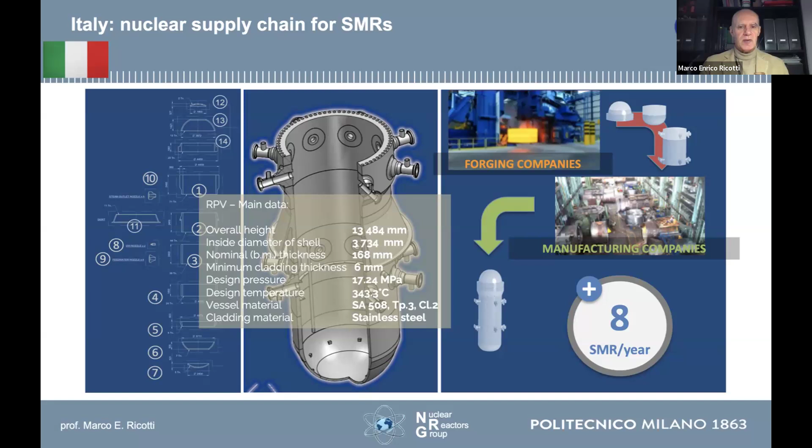So imagine that the forging companies are producing forged pieces to be moved immediately to the manufacturing companies when they are produced, and the manufacturing companies are assembling and completing the manufacturing process for the SMR integral PWR reactor pressure vessel. Italy would be able, after 2 years of transient, to produce 8 SMRs per year. So 8 SMR reactor pressure vessels per year. That is quite an interesting number.

Let me close with a comment on human resources. This is the trend of nuclear engineering graduate students in the 7 Italian universities of the consortium that Katrina mentioned. We have the Politecnico di Milano, Turin, then universities of Bologna, of Pisa, of Rome La Sapienza, and Palermo, and University of Padua, but they are mainly involved in fusion.

We had a peak of 250, less than 300 graduated students per year in the 80s when we had 4 nuclear power plants in operation and 1 under construction. Then we had a reduction even before Chernobyl, but after Chernobyl, a steady decline in the numbers. After Fukushima, we even had a minimum of less than 50, but you see the trend in the last 3-4 years.

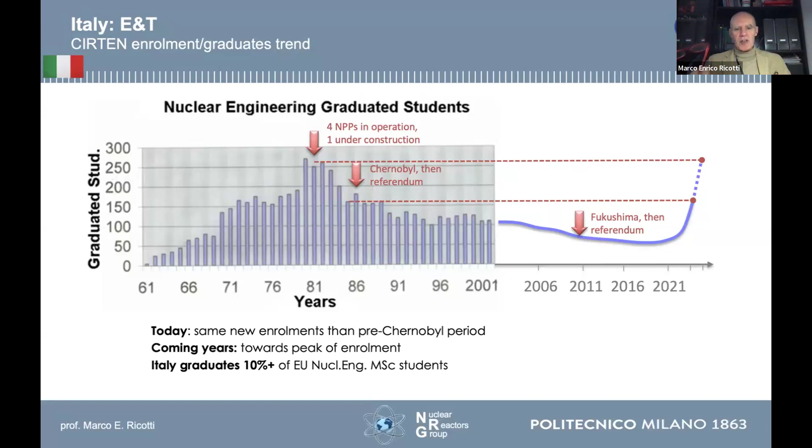Next year, we may reach the same level of graduated students that we had before the Chernobyl accident, without having any nuclear power plants in operation. That is quite amazing. So we have now more or less the same enrollment as pre-Chernobyl. We are targeting the peak in the coming years, and we may say that Italy will graduate, roughly speaking, more than 10% of the European nuclear engineers in the Master of Science programs.

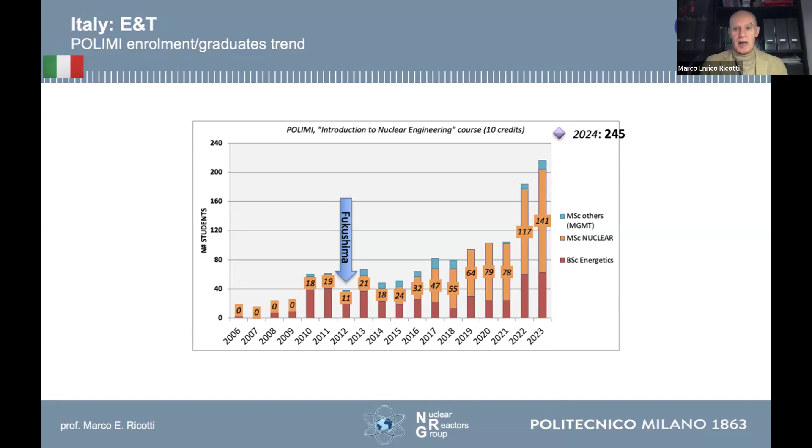If I put the number of today, yes, today I have more than 240 students in my course. That is an impressive number of people.